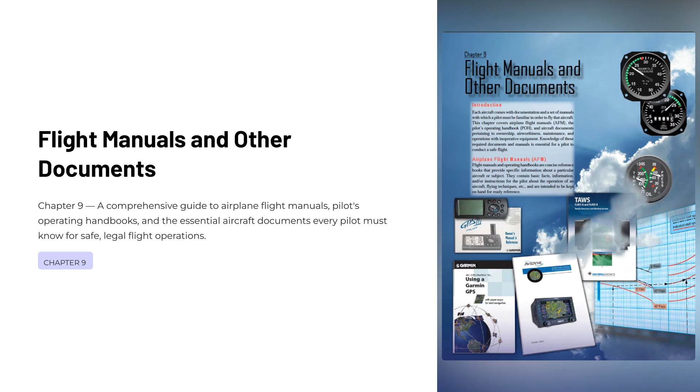Welcome to Chapter 9, where we'll explore flight manuals and other essential documents that every pilot must understand. This chapter covers the airplane flight manual, the pilot's operating handbook, and the critical paperwork required for legal and safe flight operations. As a pilot, your ability to locate, interpret, and apply information from these documents is not just a regulatory requirement, it's a fundamental safety skill. Whether you're conducting a pre-flight inspection, planning a cross-country flight, or managing an abnormal situation in the cockpit, these documents are your primary reference. By the end of this chapter, you'll have a thorough understanding of how these materials are organized, what they contain, and how to use them effectively in real-world flying scenarios. Let's get started.

Every aircraft comes with a set of required documents and manuals, and as a pilot, you are expected to know them inside and out. Familiarity with these materials isn't just a regulatory requirement, it's a fundamental part of operating safely and making sound decisions before and during flight. In this chapter, we'll cover 4 key areas. First, we'll look at flight manuals, including the airplane flight manual, the pilot's operating handbook, and owner and information manuals. What makes each one unique and when each applies?

From there, we'll walk through the 9 standardized sections found in an AFM or POH, which cover everything from aircraft limitations and emergency procedures to performance data. We'll then examine the documents that must be on board your aircraft at all times, including the registration and airworthiness certificate. Finally, we'll address required inspection intervals, airworthiness directives, and the rules governing inoperative equipment. By the end of this chapter, you'll have a solid understanding of how to locate critical information and ensure your aircraft is legally and safely airworthy.

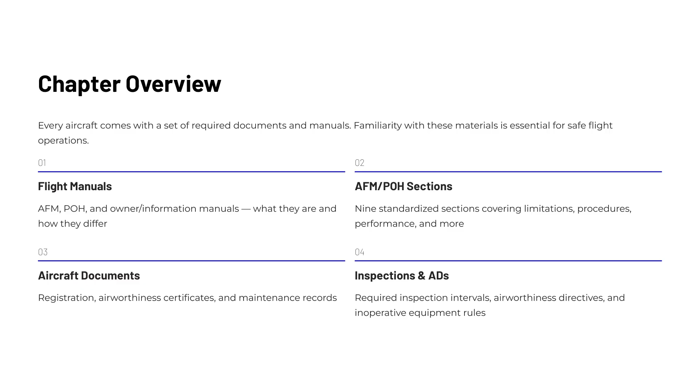The Airplane Flight Manual, or AFM, is a manufacturer-developed document that carries FAA approval. It is specific not just to the make and model of an aircraft, but to a particular serial number. Under 14 CFR Part 91, pilots are required to comply with the operating procedures and limitations outlined in the AFM. This is not optional guidance, it is a regulatory requirement.

For most light aircraft manufactured after 1975, the pilot's operating handbook, or POH, serves as the FAA-approved flight manual. The POH contains all of the AFM information, and its title page will clearly identify which sections carry FAA approval. That distinction matters when you need to reference authoritative performance data or operating limitations.

You may also encounter an owner's manual or information manual for certain aircraft. It is essential to understand that these documents are for general reference only. They are not FAA approved, they are not aircraft specific, and they are not required to be kept current. They cannot substitute for the AFM or POH under any circumstances.

Finally, to bring consistency across the industry, the General Aviation Manufacturers Association established GAMA Specification Number 1, which created a standardized 9-section format used across all general aviation AFMs and POHs. This standardization makes it easier for pilots to locate critical information quickly, regardless of the aircraft they are flying.

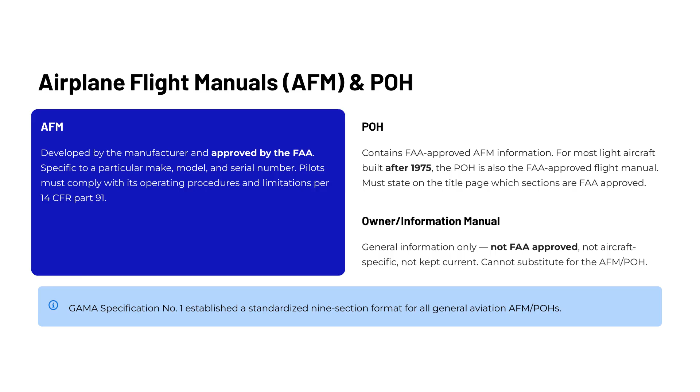The AFM and POH are divided into 9 standardized sections, and knowing what lives in each one is essential for finding critical information quickly, especially under pressure. Section 1, General, gives you foundational knowledge about the aircraft, its dimensions, power plant description, and the definitions and abbreviations used throughout the rest of the manual. Think of it as your reference dictionary.

Section 2 covers limitations. This is arguably the most important section. It defines the boundaries you must never exceed, including airspeed limits, power plant operating ranges, weight and loading restrictions, and required placards. Section 3 addresses emergency procedures.

These are your checklists for engine failures, fires, and system malfunctions. In an actual emergency, you need to know this section cold. Section 4 covers normal procedures, everything from pre-flight inspection through post-flight, including amplified procedures that explain the reasoning behind each step. Section 5 is performance.

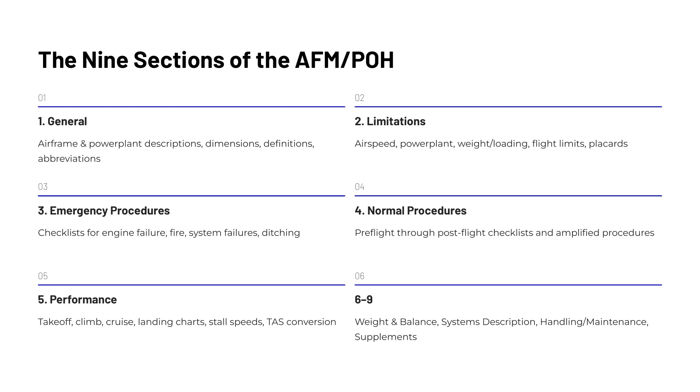This is where you find your takeoff and landing distance charts, climb performance data, cruise tables, stall speeds, and true airspeed conversions. Sections 6 through 9 round out the manual with weight and balance, systems descriptions, handling and maintenance information, and supplements for optional or additional equipment. Familiarize yourself with the layout of your specific aircraft's manual so you can navigate it efficiently when it matters most.

The airspeed indicator uses a standardized color coding system that you must know by memory because in flight, you need to interpret these markings instantly without hesitation. The red line marks VNE, the never exceed speed. Operating above this speed risks structural damage or failure, so treat it as an absolute limit under any conditions.

The yellow arc spans from VNO to VNE. This is the caution range, where you may only operate in smooth air. If you encounter turbulence while in the yellow arc, reduce power and slow below VNO as smoothly as possible.

The green arc represents your normal operating range, from VS1, the stall speed in a clean configuration, up to VNO, the maximum structural cruising speed. This is where you'll spend most of your flight time.

The white arc covers the flap operating range, from VS0, the stall speed in landing configuration, up to VFE, the maximum flap extended speed. Extending flaps above VFE risks structural damage to the flap system.

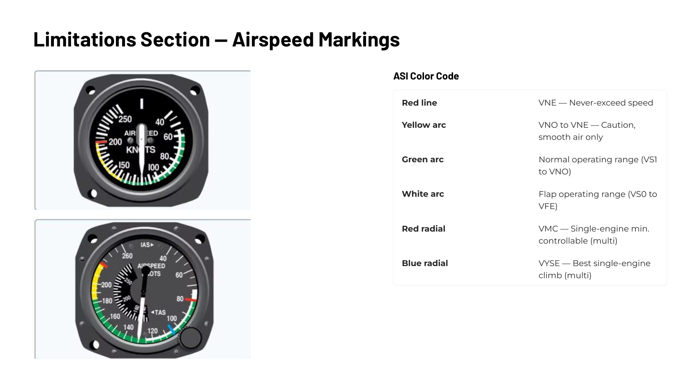For multi-engine aircraft, there are two additional markings. The red radial indicates VMC, the minimum controllable airspeed with one engine inoperative. The blue radial marks VYSE, your best rate of climb speed on a single engine, commonly called blue line. Staying at or above blue line is critical for climb performance during single-engine operations.

Section 2 of the Pilot's Operating Handbook dedicates significant attention to three interconnected areas of limitations: power plant, weight and loading, and flight, and understanding each one is essential for safe, legal aircraft operation.

Starting with power plant limits, this section defines the boundaries for takeoff power, maximum continuous power, and normal operating power, which corresponds to the green arc on your tachometer. It also specifies acceptable oil and fuel grades, minimum and maximum pressures, and propeller limits.

Note that an RPM indicator is a required instrument on all reciprocating engine aircraft. It is not optional equipment.

Weight and loading distribution covers your maximum certificated weights and the approved center of gravity range. The reference datum location is identified here as well. Keep in mind that while the limits are stated in this section, the actual weight and balance computations are performed using the methods and data found in Section 6.

Flight limitations define what the aircraft is certified to do, and equally important, what it is not. This includes authorized maneuvers and their entry speeds, load factor limits, and explicitly prohibited maneuvers such as spins or acrobatic flight. Operational restrictions like flight into known icing conditions are also addressed here.

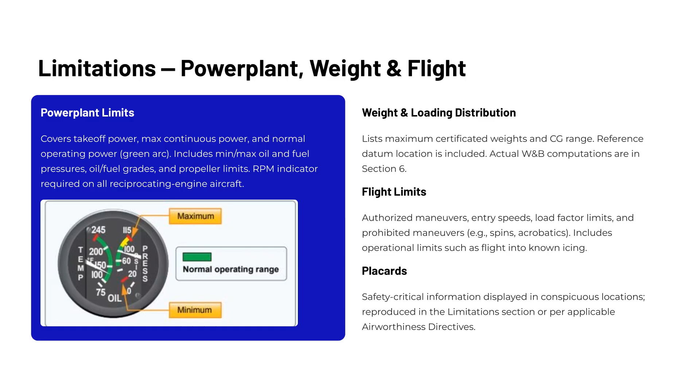Finally, placards display safety-critical information in conspicuous locations throughout the cockpit. These are legally binding and are reproduced in the limitations section or referenced through applicable airworthiness directives.

Sections 3, 4, and 5 of the Pilot's Operating Handbook each serve a distinct and critical purpose, and understanding how to navigate them effectively is essential to safe, competent flight operations.

Section 3 covers emergency procedures. It's organized into two layers: abbreviated checklists containing immediate action items, which you must commit to memory, followed by amplified checklists that provide additional detail. These procedures address engine failure, fire, system failures, in-flight restart, and ditching.

The critical discipline here is this: complete your memorized immediate action items first, then reference the full checklist to verify and continue. In a real emergency, you won't have time to read before you act.

Section 4 covers normal procedures, beginning with airspeeds for normal operations, then walking through checklists from pre-flight all the way to post-flight. The Amplified Procedures section explains the reasoning behind each step. Always use approved checklists. Consistent adherence isn't just good practice, it's a hallmark of a disciplined, professional pilot.

Section 5 is your performance reference. It contains charts, tables, and graphs covering takeoff, climb, cruise, landing, stall speeds, and true airspeed conversion.

As a practical example, using the stall speed chart at Figure 9.6, at a weight of 2,170 pounds, in a 20-degree bank with 40 degrees of flaps, your indicated stall speed is 44 knots. Knowing how to extract and apply this data accurately is fundamental to flight planning and airspace safety.

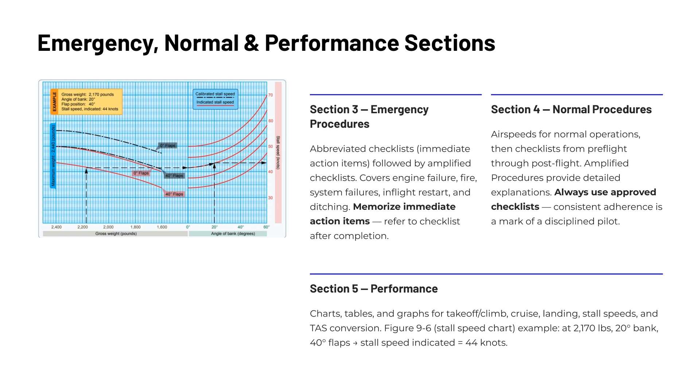Sections 6 through 10 of the Pilot's Operating Handbook round out the comprehensive guidance every pilot needs to operate an aircraft safely and efficiently. Section 6 covers weight and balance, providing all FAA-required data, the equipment list, and sample loading problems. This is critical material, and you'll explore it in much greater depth in Chapter 10 of this course.

Section 7 describes the aircraft systems at a level appropriate for the intended pilot, covering everything from the engine and fuel system to electrical and flight controls. Chapter 7 will give you a thorough breakdown of each system.

Section 8 addresses handling, servicing, and maintenance. This includes manufacturer-recommended inspection intervals, what preventive maintenance pilots are authorized to perform themselves, and proper ground handling procedures like tie-down and hangaring.

Section 9 contains supplements for optional or additional equipment installed on the aircraft, things like autopilots, GPS navigation systems, or air conditioning. These supplements are inserted into the POH at the time the equipment is installed, so the content will vary from aircraft to aircraft.

Finally, Section 10, when included, offers safety tips covering topics like physiological factors, weather awareness, fuel conservation, and special considerations for high-altitude or cold weather operations. While optional, this section provides genuinely valuable guidance for operating safely across a variety of conditions.

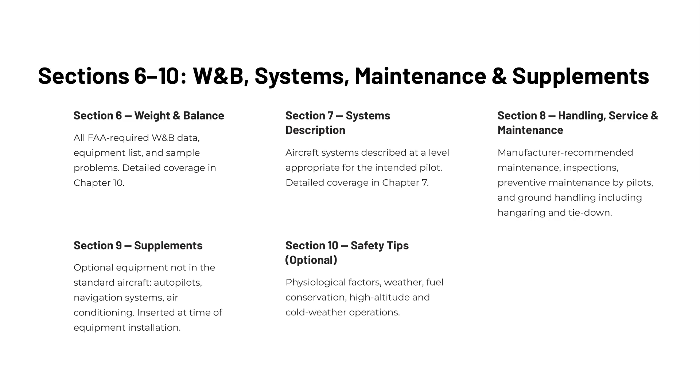Before any aircraft can legally take to the skies, it must be registered with the FAA Aircraft Registry, and the Certificate of Aircraft Registration must be carried on board at all times during flight.

There are several circumstances that render a registration invalid. These include the aircraft being destroyed or scrapped, a transfer of ownership, the registered owner losing United States citizenship, the aircraft being registered under foreign laws, or the submission of a written cancellation request to the FAA.

If you're operating an aircraft that hasn't yet received its permanent certificate, the pink copy of AC Form 8050-1 serves as a temporary authorization, allowing you to legally operate the aircraft for up to 90 days. However, this temporary authorization does not permit operation outside the United States. You must have the permanent certificate in hand before flying internationally.

One important distinction to understand is that the FAA does not issue certificates of ownership. Registration and ownership are not the same thing. Holding a registration certificate does not prove you own the aircraft. Additionally, when an aircraft changes hands, the responsibility falls on the previous owner to notify the FAA of that transfer. Keep this in mind when buying or selling an aircraft to ensure the registration records remain accurate and current.

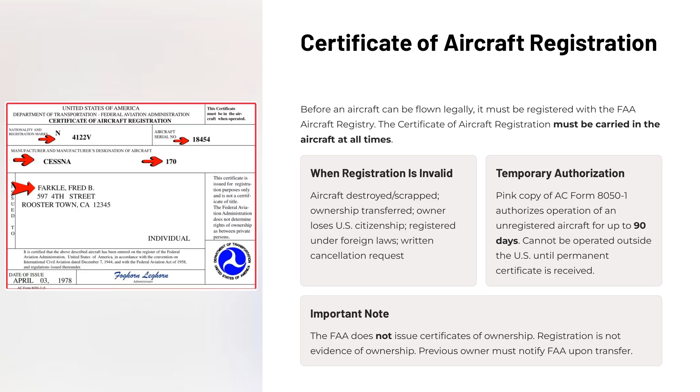The Airworthiness Certificate is one of the required documents that must be on board the aircraft during any flight operation. A standard airworthiness certificate is issued by the FAA after an inspection confirms the aircraft meets the requirements of 14 CFR Part 21 and is in a condition for safe operation. This certificate applies to aircraft in the normal, utility, acrobatic, commuter, and transport categories, as well as manned free balloons.

One of the most important things to understand about this certificate is that it must be displayed inside the aircraft in a location that is clearly legible to both passengers and crew. The good news is that once issued, a standard airworthiness certificate remains valid indefinitely, but only as long as the aircraft continues to be maintained in accordance with 14 CFR Parts 21, 43, and 91, and remains on the U.S. Aircraft Registry.

When reviewing the certificate, you will find several key data items including the nationality and registration marks, where the N prefix confirms U.S. registration, the manufacturer and model, the serial number matching the aircraft data plate, and the operating category.

For aircraft that fall outside the standard category, such as experimental, restricted, limited, or light sport aircraft, a special airworthiness certificate is issued instead. These come with specific operating limitations, and you should contact your local Flight Standards District Office, or FSDO, for details.

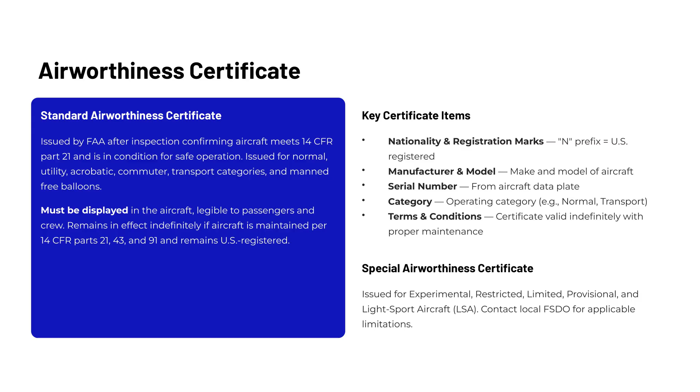Under 14 CFR Part 91, the owner or operator holds primary responsibility for ensuring their aircraft remains in airworthy condition at all times. This is not a shared responsibility. It rests squarely with you as the owner or operator.

Two inspection requirements form the foundation of general aviation maintenance compliance. The annual inspection is required every 12 calendar months for small aircraft operated for business or personal use. This inspection must be performed by an airframe and powerplant mechanic who also holds an inspection authorization, commonly referred to as an IA.

The 100-hour inspection applies to aircraft under 12,500 pounds that are used to carry passengers for hire or provide flight instruction for hire. One important flexibility here: the 100-hour limit may be exceeded by up to 10 hours, but only when necessary to fly the aircraft to a maintenance facility. Any hours flown beyond the limit count toward the next 100-hour interval.

Beyond these two primary requirements, large aircraft, turbojets, and turbopropeller multi-engine aircraft operate under separate inspection programs outlined in 14 CFR Part 43 and Part 91 Subpart E. As a practical guideline, experience in the field suggests that most aircraft benefit from some level of preventive attention every 25 hours or less, with minor maintenance needs arising at least every 100 hours. Staying ahead of the maintenance curve is always the safer and more cost-effective approach.

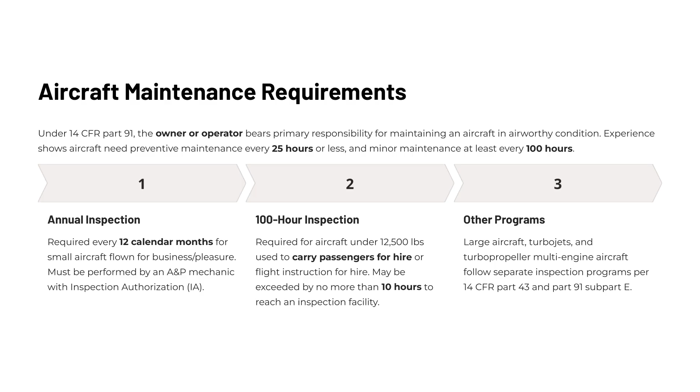Three critical inspections fall outside the standard annual and 100-hour requirements, and every pilot operating under instrument flight rules needs to understand them thoroughly. First, your altimeter system. Under 14 CFR 91.411, the altimeter, encoding altimeter, and related systems must be tested and inspected within the preceding 24 calendar months. This inspection is required before conducting IFR operations in controlled airspace. If that 24-month window has lapsed, you are not legal to file and fly IFR.

Second, the transponder. Under 14 CFR 91.413, your transponder must also be tested and inspected within the preceding 24 calendar months. Notably, this requirement applies regardless of airspace. Unlike the altimeter inspection, there is no IFR-only qualifier here.

Third, the Emergency Locator Transmitter, or ELT. This one operates on a 12 calendar month cycle under 14 CFR 91.207. Inspectors check for proper installation, battery corrosion, control and crash sensor operation, and antenna signal integrity. The battery must be replaced if the ELT has been used for more than 1 cumulative hour, or when it reaches 50% of its useful battery life, whichever comes first. Critically, the battery expiration date must be legibly marked on the outside of the transmitter and recorded in the aircraft maintenance log.

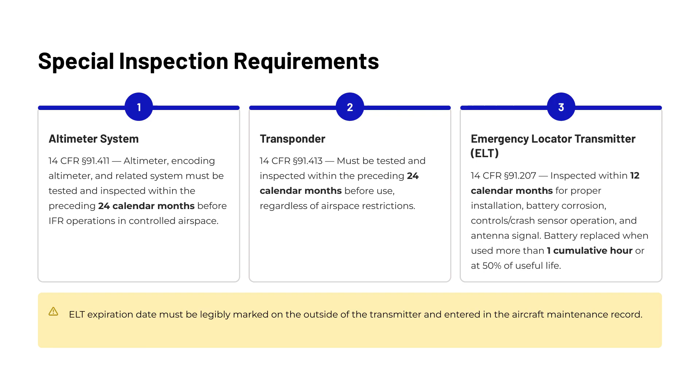Airworthiness directives, commonly referred to as ADs, are legally mandated actions issued by the FAA under 14 CFR Part 39. They exist for one reason: to correct unsafe conditions identified in aircraft, engines, propellers, or appliances. Compliance is not optional. Unless the FAA has granted a specific exemption, you are required to comply.

ADs fall into two categories. Category 1 is an emergency AD, which requires immediate compliance before the aircraft flies again. These are issued when an unsafe condition presents an immediate hazard to flight safety. Category 2 is a non-emergency AD, which allows compliance within a defined time frame and may include recurring actions, such as an inspection every 50 hours.

All active ADs and the AD bi-weekly publication are available at no cost through the FAA's Regulatory and Guidance Library at rgl.faa.gov. You should be checking this resource regularly.

From a record-keeping standpoint, 14 CFR Section 91.417 is very specific about what must be documented. Your records must include the AD number, the method of compliance, the revision date, the next due date for any recurring AD, and the certificate number of the mechanic who performed the work. Incomplete records are a compliance failure in themselves, so make sure every entry is thorough and accurate.

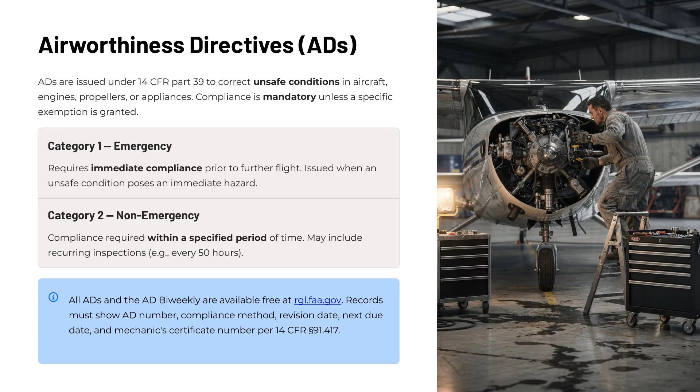Under 14 CFR Part 91, all instruments and equipment installed on an aircraft must be operative before departure. However, the Minimum Equipment List concept provides a structured, FAA-approved framework for operating with certain items that are inoperative, but deemed non-essential for safe flight.

The most widely used method for handling inoperative equipment is the deferral provision found in Section 91.213(d). As the pilot in command, you are responsible for determining whether the inoperative item is required by the aircraft's type design, by regulation, or by an airworthiness directive. If the item does not fall into any of those categories and the aircraft can be safely operated without it, a deferral is permitted. The item must then be deactivated or physically removed and placarded as inoperative.

When an operator has requested and received an FAA-approved MEL along with a letter of authorization, use of that MEL becomes mandatory, not optional. The MEL, the LOA, the preamble, and the associated procedures document must all be carried on board during every operation. The FAA treats an approved MEL as equivalent to a supplemental type certificate, which underscores the legal weight it carries.

One critical distinction to remember: maintenance deferrals are never the appropriate response to an in-flight discrepancy. If a system or component fails in flight, you must follow the procedures outlined in your AFM or POH, not the MEL deferral process.

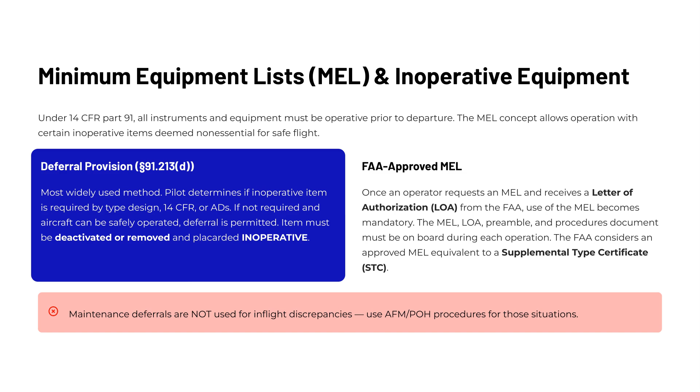Certificated pilots have the authority to perform certain preventive maintenance tasks on aircraft they own or operate, but it's important to understand the boundaries of this privilege. This is governed by 14 CFR Part 43, Appendix A(c), and it applies to most certificated pilots. However, student pilots, sport pilots, and recreational pilots are excluded. Additionally, the aircraft must not be used in air carrier service.

The types of tasks allowed are intentionally limited to simple, minor operations. These include things like changing oil, servicing landing gear, replacing spark plugs, swapping out safety belts or light bulbs, cleaning fuel and oil strainers, servicing batteries, replenishing hydraulic fluid, and updating panel-mounted navigation software databases.

One critical requirement that pilots sometimes overlook is the maintenance entry. Anytime you perform preventive maintenance, you must make a proper logbook entry. That entry needs to include a description of the work performed, the date it was completed, and your name, signature, certificate number, and certificate type. This isn't optional. It's a regulatory requirement, and skipping it can have serious legal and safety implications. Proper documentation ensures the aircraft's maintenance history remains accurate and complete.

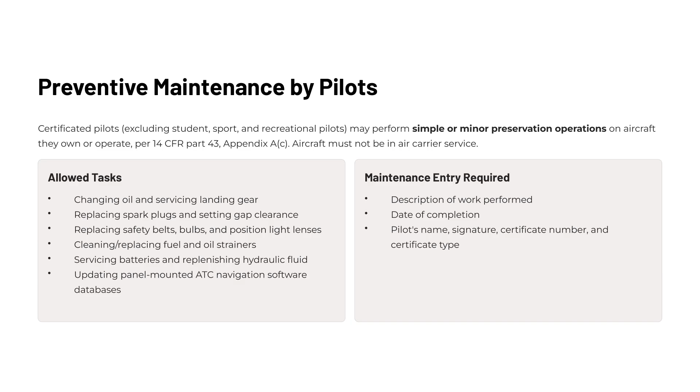When it comes to repairs and alterations, the regulations under 14 CFR Part 43, Appendix A, divide all maintenance work into two categories: major and minor. Major repairs and alterations are those that, if improperly done, could significantly affect structural strength, flight characteristics, or other airworthiness qualities. These require approval using FAA Form 337 and must be signed off by either a certificated repair station, an airframe and power plant mechanic holding an inspection authorization, or an FAA representative.

Minor repairs and alterations carry less risk if performed incorrectly and can be approved by an A&P mechanic or certificated repair station through a proper maintenance record entry. No Form 337 required. When an aircraft doesn't currently meet airworthiness requirements but can still be safely operated for a specific limited purpose, a special flight permit may be issued.

This is a type of special airworthiness certificate that authorizes flight under defined conditions. Common situations include flying an aircraft to a maintenance base for repairs, delivering or exporting an aircraft, evacuating from an area facing imminent danger, or operating an overweight aircraft where fuel and landing options are limited. To obtain a special flight permit, you'll work with your local Flight Standards District Office, or FSDO, or a designated airworthiness representative, commonly referred to as a DAR.

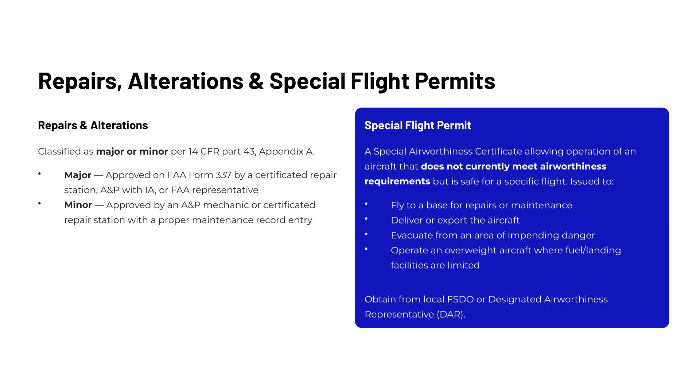As an aircraft owner or operator, you carry a set of important legal and safety responsibilities that go beyond simply flying the aircraft. Let's walk through each of them. First, you are required to keep two critical documents on board the aircraft at all times: a current airworthiness certificate and a certificate of aircraft registration. These must be present during any operation, and you should expect to produce them upon request.

Second, you are responsible for maintaining airworthiness. This means complying with all applicable airworthiness directives, ensuring that all maintenance is properly documented, and correcting any defects that arise between scheduled inspections. Airworthiness is not just the mechanic's responsibility, it begins with you. Third, stay current on the regulations that govern your aircraft's operation and maintenance. Rules can change, and it is your obligation to remain informed.

Finally, you must notify the FAA of certain changes under 14 CFR Part 47, Section 47.41. This includes any change to your permanent mailing address, the sale or export of the aircraft, or a loss of eligibility to hold registration. Keeping your records accurate with the FAA ensures your aircraft remains properly registered and legally operable.

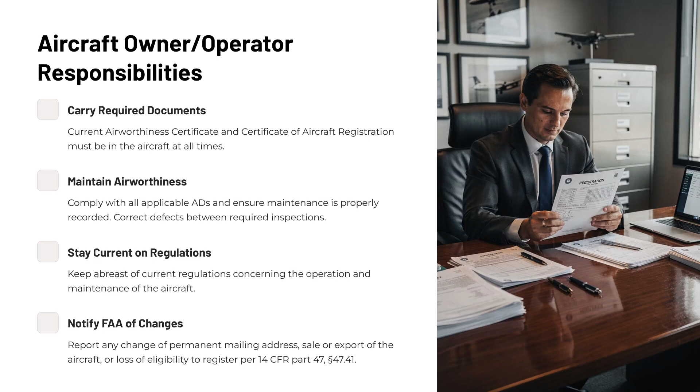A simple and effective way to remember the required documents that must be on board any aircraft during operation is the acronym AROW. Let's walk through each one. The A stands for Airworthiness Certificate, which must be displayed in the aircraft and remain legible to both passengers and crew. The R stands for Registration Certificate.

The official certificate of aircraft registration must be carried at all times during flight. The O stands for Operating Limitations, which are found in the Aircraft Flight Manual or Pilot's Operating Handbook and must be FAA approved and specific to that aircraft. And the W stands for Weight and Balance, current data that is specific to the aircraft's serial number, not just a generic document. One additional requirement to keep in mind: if your aircraft is operating under an approved minimum equipment list, you must also have the MEL itself, the letter of authorization, the preamble, and the associated procedures document on board.

Together, AROW plus the MEL package ensures you are fully compliant before every flight.

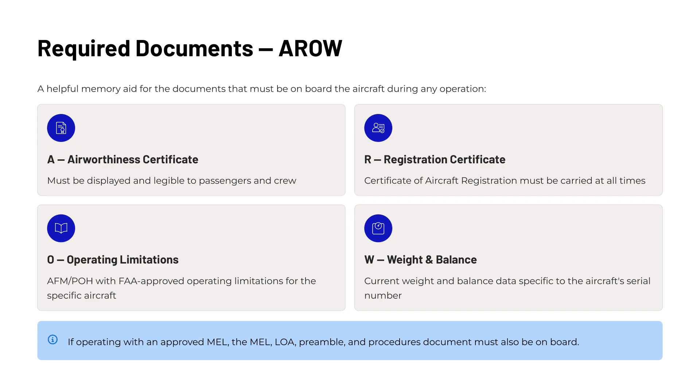Section 9 of the AFM or POH is dedicated entirely to supplements, and understanding how to use this section is essential for any pilot operating an aircraft with optional equipment installed. Not every aircraft of the same make and model will have identical avionics or systems, so the supplements ensure that pilots have accurate, FAA-approved guidance specific to the equipment actually on board their aircraft.

Supplements cover a wide range of optional systems. These can include autopilot systems, GPS, and navigation units, such as the Garmin GPS III, terrain awareness and warning systems known as TAWS, air conditioning systems, and multifunction displays like the Avidyne MFD. Each of these systems may have specific operating procedures, limitations, or emergency checklists that differ from the base aircraft configuration.

A key point to remember is that supplement information is inserted into the flight manual at the time the optional equipment is installed. This means two aircraft of the same model sitting side by side on the ramp may have completely different supplements depending on how each one is equipped. Before flying an unfamiliar aircraft, always review which supplements apply to that specific airplane and familiarize yourself with any procedures unique to its installed equipment.

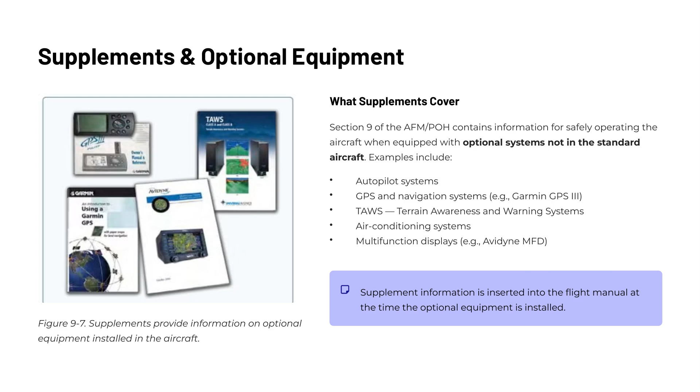As we wrap up Chapter 9, let's reinforce the core principles that every pilot needs to carry forward. First, know your manual. The AFM or POH is an FAA-approved, legally binding document specific to your aircraft. The owner's manual simply does not carry the same authority.

Second, never depart without your AROW documents on board: airworthiness certificate, registration, operating limitations, and weight and balance data. These are required by regulation, not just best practice. Third, stay current on inspections and airworthiness directives. Annual, 100-hour, altimeter, transponder, and ELT inspections all have mandatory intervals, and AD compliance is never optional.

Fourth, handle inoperative equipment correctly. Use the Section 91.213D deferral process or an approved MEL, always placard the item, and never attempt to defer a discrepancy that occurs in flight. Use your AFM or POH procedures instead.

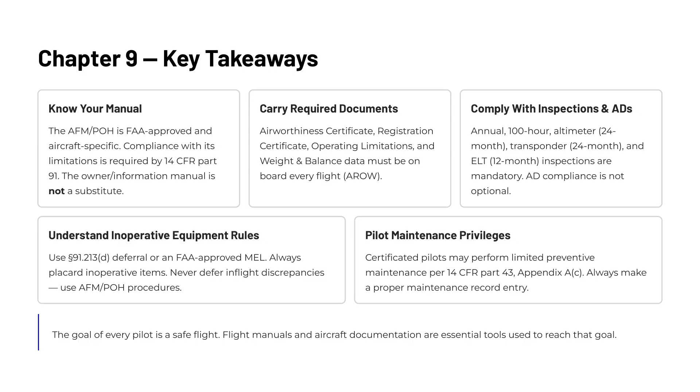Finally, understand the scope of your maintenance privileges as a certificated pilot. You may perform limited preventive maintenance under Part 43, but always make a proper logbook entry. Every one of these requirements exists for the same reason: to support a safe flight. Your aircraft documentation is not paperwork. It is a critical tool in your safety toolkit.